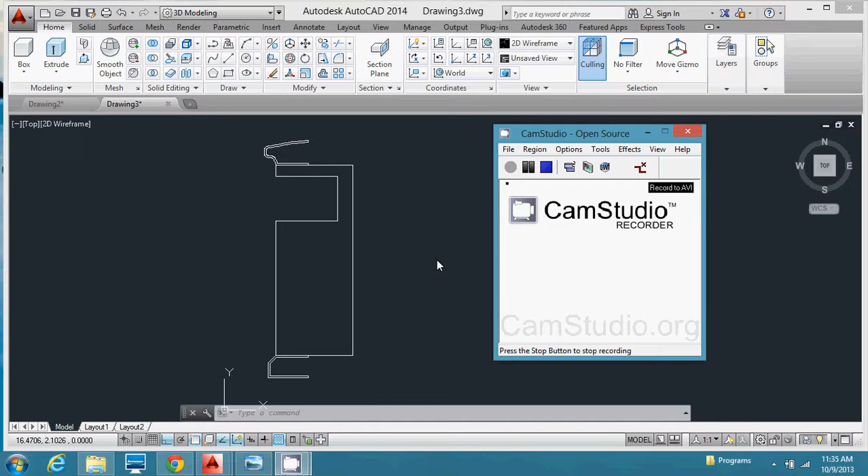Alright, our next step is to use the revolve command so we can revolve the top and bottom and see what we come up with.

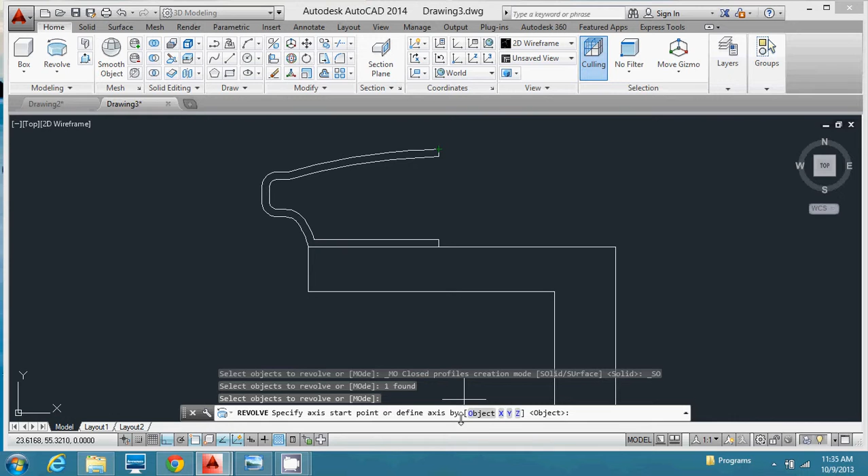To do this, you go to revolve, which is right under extrude. I select the first item and click space or enter, then I have to press the axis. So my axis is going to be this line right here, like so.

It's going to ask me at what degrees I want to cut it shorter. No, I want 360, so I click space or enter. And I do the same thing at the bottom piece.

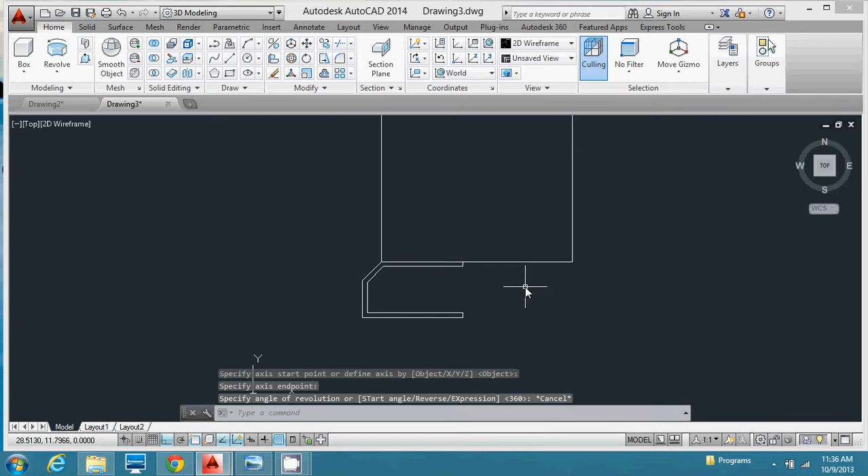Make sure you have ortho on, because otherwise sometimes your object will not be exactly what you were looking for. Again, select it, revolve. I have ortho on, so my mouse moves directly 90 degrees. And we have top and bottom.

Now to get a better visual view, I go to my view tab and go to conceptual. So you can see I have a top and bottom.

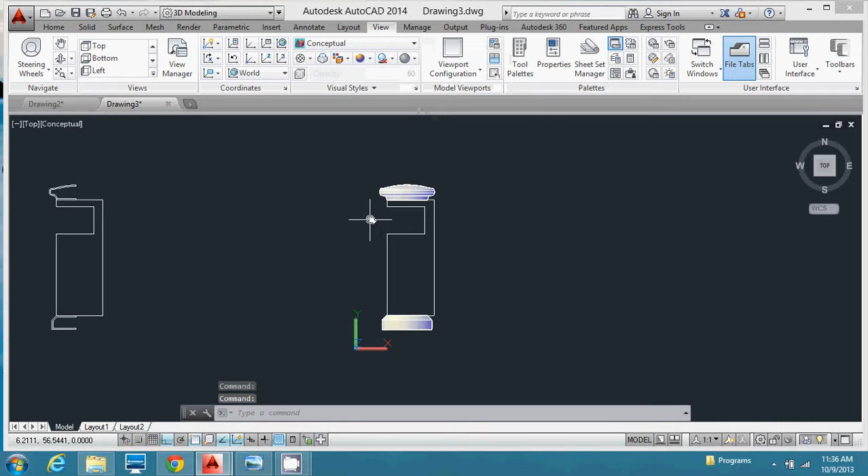Now it's a little bit smaller than I designed it to be, but that's alright, I can work with it. I can just make the body a little bit smaller than what was planned out to be.

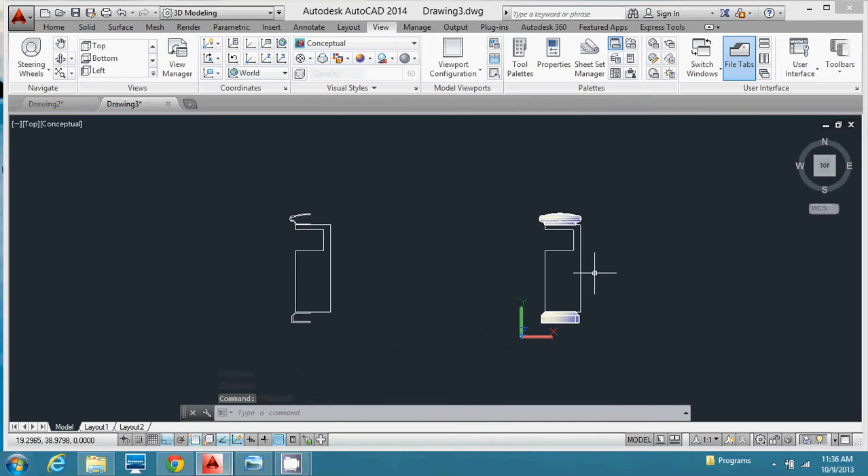So my next step will be to actually offset this box area to create some sort of opening. Actually, in this situation I made it too small, so I do have to resolve it because that opening has to be to specs, I have to make sure it's correct. Now to do this, I think my computer is going a little slow.

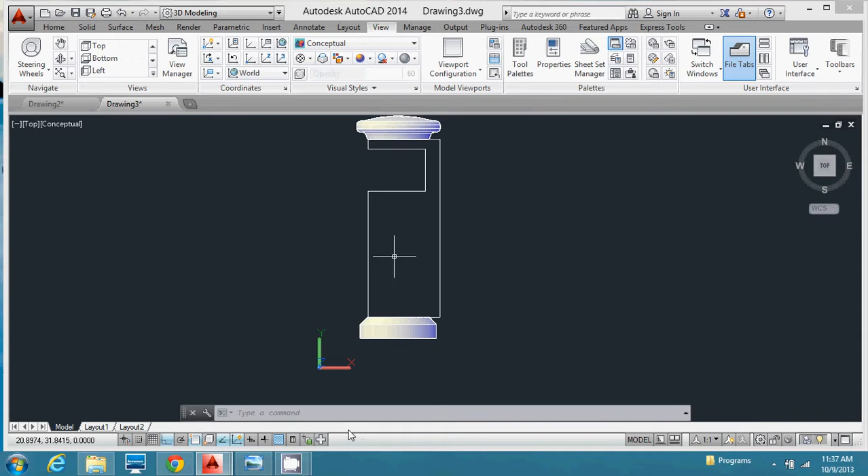Alright, sorry about that. So actually I'm going to leave it as is. I'm just going to stretch this back because it looks like I can keep it to this size since that mailbox opening does still fit and it gives me some support right here.

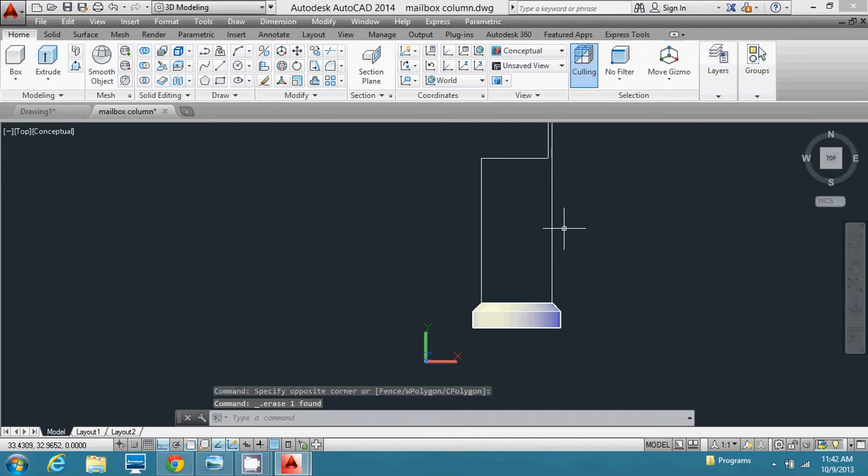So I'm going to delete these top and bottom. That's what my opening would be looking like. Kind of looks disastrous from this side, and actually if I was to be specific, it should be like this. That would be our opening.

Now I have my top and bottom. My next goal will be to extrude the bottom to the top. I'm going to use this box to remove the material.

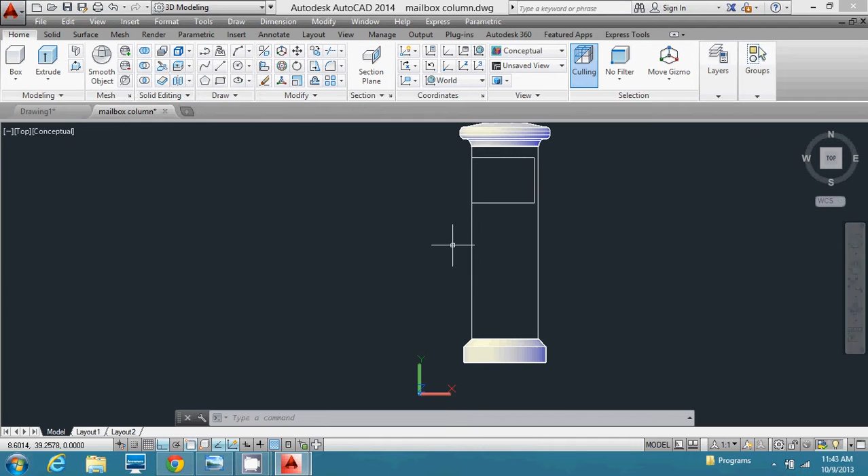Instead of drawing a circle and extruding, what I can do in this case, I'm going to go to 3D view and use extrude face. To do that, I go over here, extrude faces. The other option is to go to modify, solid editing, extrude faces.

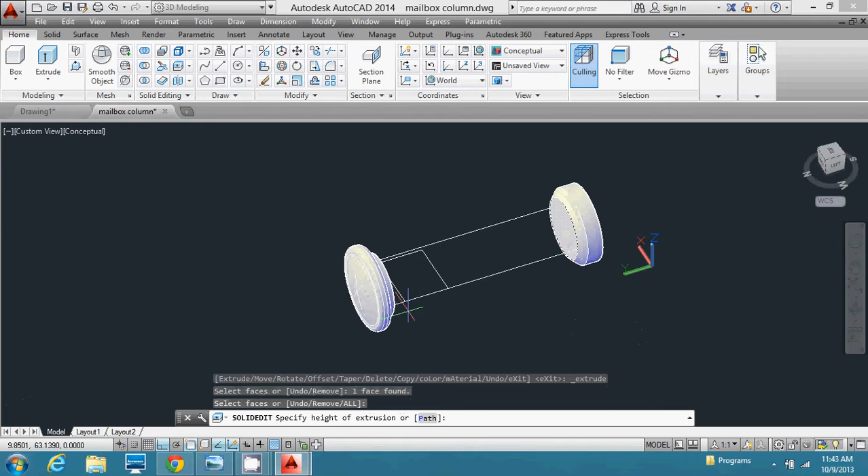I select the face I want to extrude, which is the circular one. Now it's going to ask me the distance, so I'm going to start from the center of that circle to the center of the top circle, and I keep that.

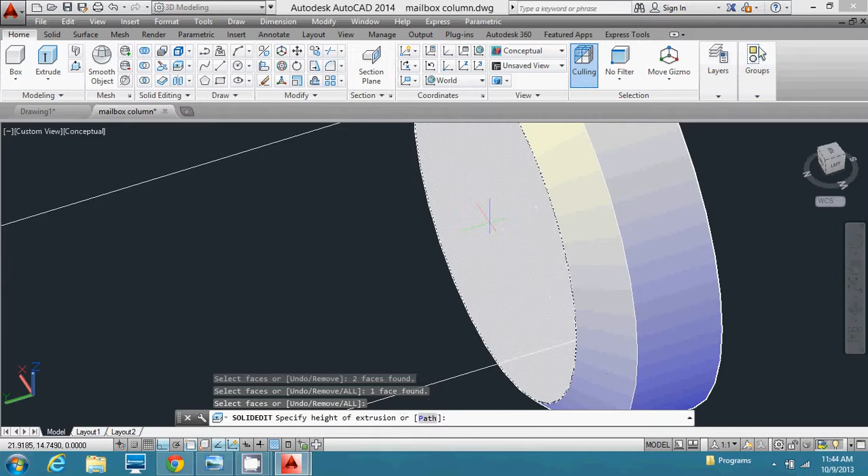Oh, looks like I hit the wrong circle extension. That's alright, you can undo and do that one more time. Sometimes it's hard to catch which center circle you're hitting. There we go.

And nope, it still doesn't work that well. That's alright, I'm going to extend it even more because we are going to union this later on, so I'm going to extend it about one inch. There we go, it might be overlapping, but that's alright.

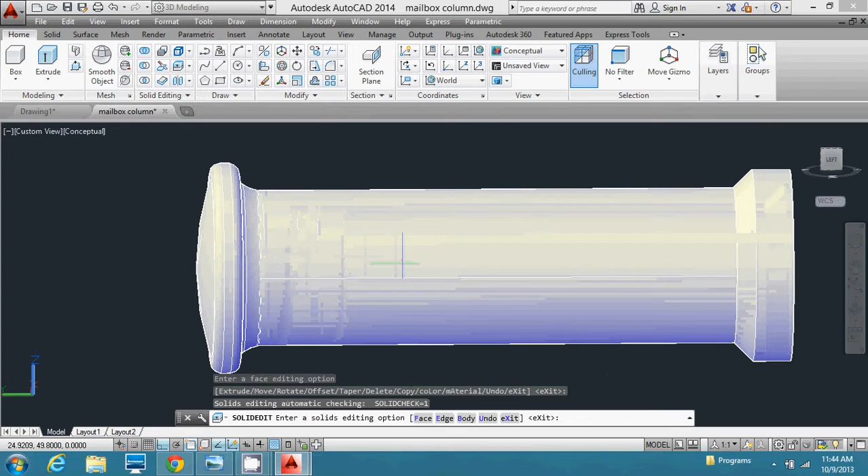There we go, we got all the pieces together. Now my next problem is I have to create that hole. To do that, I have a few different ways I can do this.

I can draw a square here and extrude it out and subtract it. Actually, we'll just do that, it will be the easiest way. So I'm going to bottom view, since my X and Y coordinates are this way. Yours might be different, that's alright.

I'm going to draw out the square, which is going to be 12 by 9 3/4. So I'm going to use the rectangle command, D for dimension, and do 9.75 by 12.

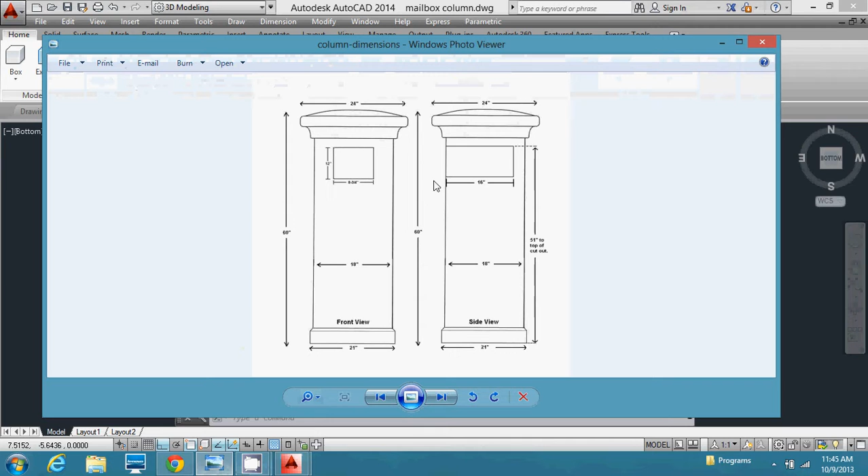So I have 12 high, 9.75 across, and 16 deep. So I have it the right way. I'm going to move it up to its location based on my reference drawing. I'm just going to draw myself a line here so that I make sure it is specified to the height. Move it down, and I'm going to move it across.

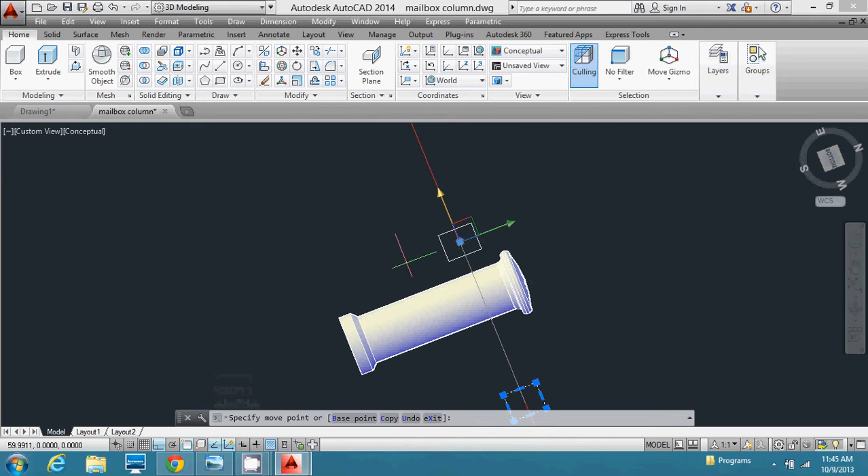3D rotate so that it's kind of centered. Oh, it's actually not that centered. So I'm going to extrude it now. That way I have a 3D item. 16.

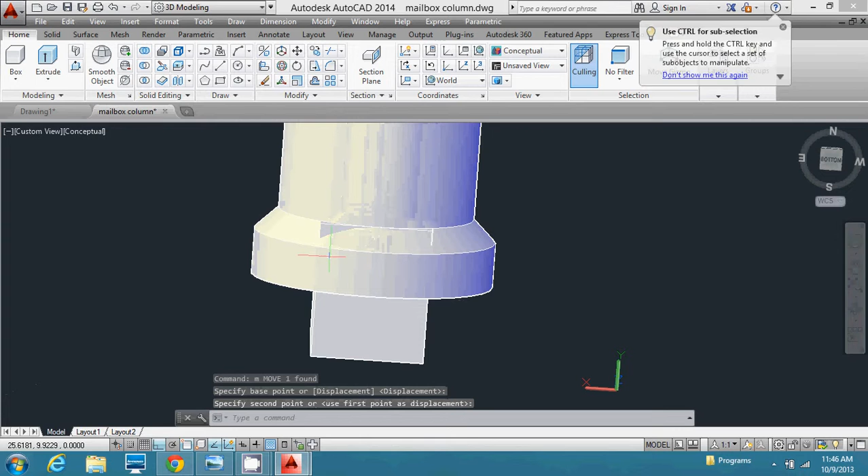We have it there. And to make my whole life much easier, I'm just going to move it from the midpoint to the quadrant of the circle. If you can't hit the quadrant, make sure your OSNAP quadrant is on. From this point, I go up. Let's see what kind of distance I have.

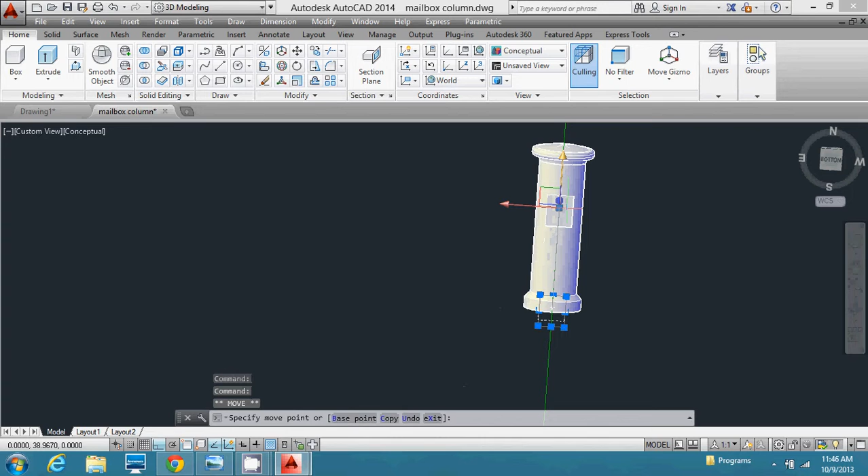From this point to this point, 48.5. So I can easily do that. Use the green arrow, 48.5. And now I can subtract. Subtract from that item this. There we go, we have our slot for the mailbox.

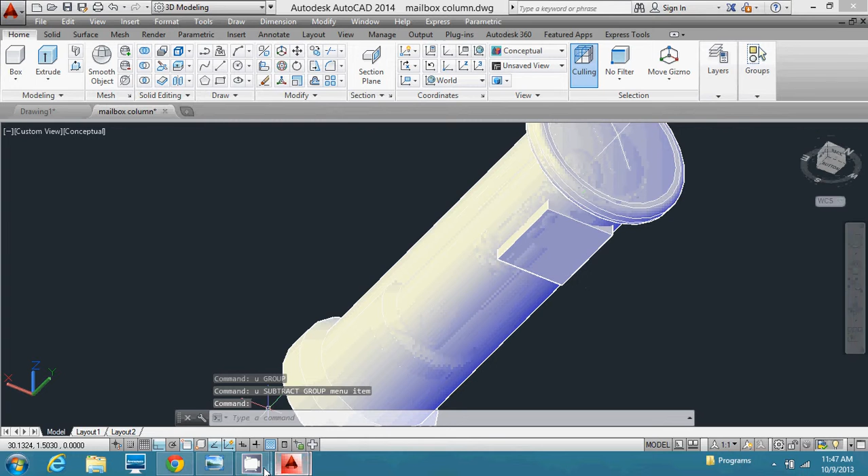Oh, it's a little deeper than I thought. So I'm going to undo. I'm not sure if there's a requirement to the actual depth size, but that's alright. I'm going to move it up on the z-axis about 1 inch, and that should be enough.

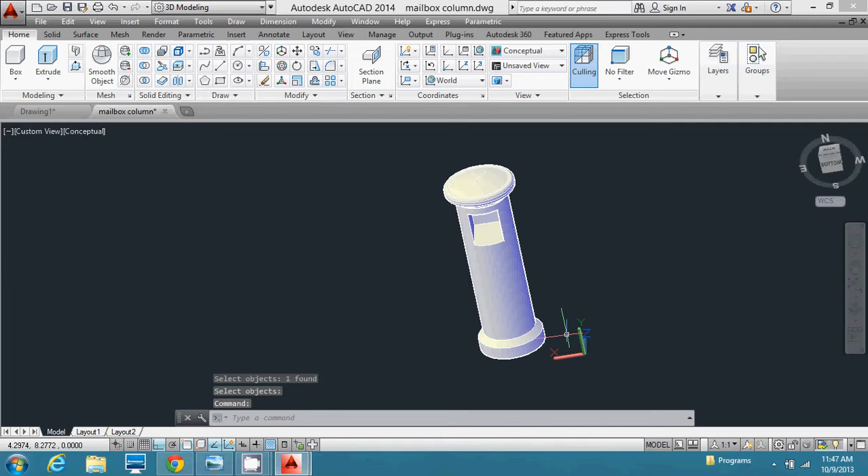So I have a 15-inch deep. And I'm going to use the subtract command again. Subtract, select the item that I want to subtract from, and now the box. There we go. So my next thing I want to do is actually make this item hollow.

To do this, I can use the shell command. Now make sure you save your work before you do this, because sometimes the computers crash. So to do the shell command, you have to... oh, that's not where it was. Sorry, I know that's modify, solid editing, shell, but I'm trying to find it here for you guys.

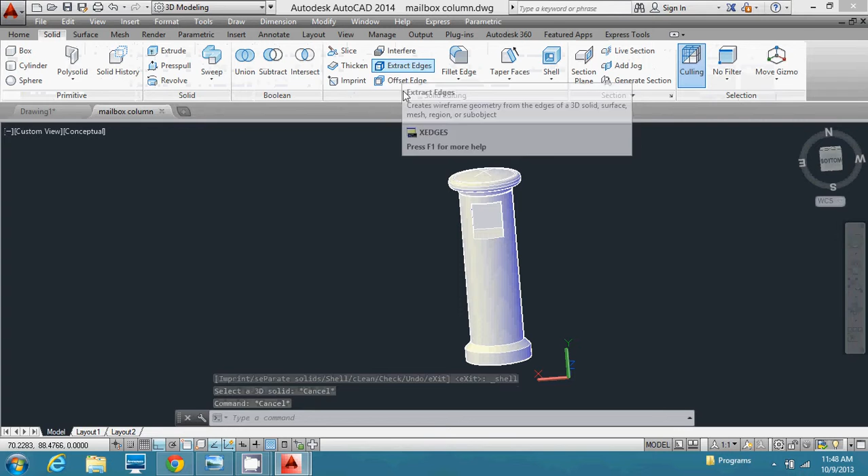Oh well. Oh, sorry, solid. There we go, and shell. There we go. So select the object which I want to shell. Oh, this is union because it got extruded. So this can be an issue because it's hollow in here, but not hollow here. So the shell might have a big problem with this.

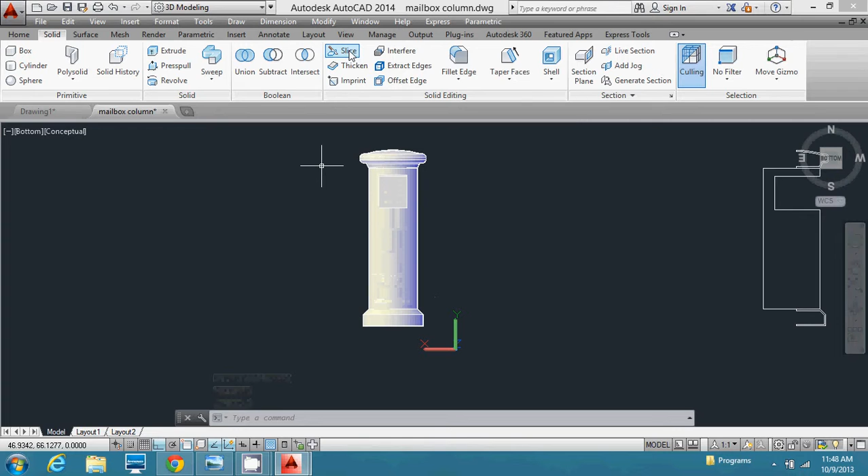So before we even do that, I want to go over the option of slicing. I'm going to slice the bottom so we separate the two items. To do that, you go to the slice command. You select the object that you want to slice, and you use a reference line. So I'm going to use the center of the circle as a reference, and now it's cut into 2 pieces.

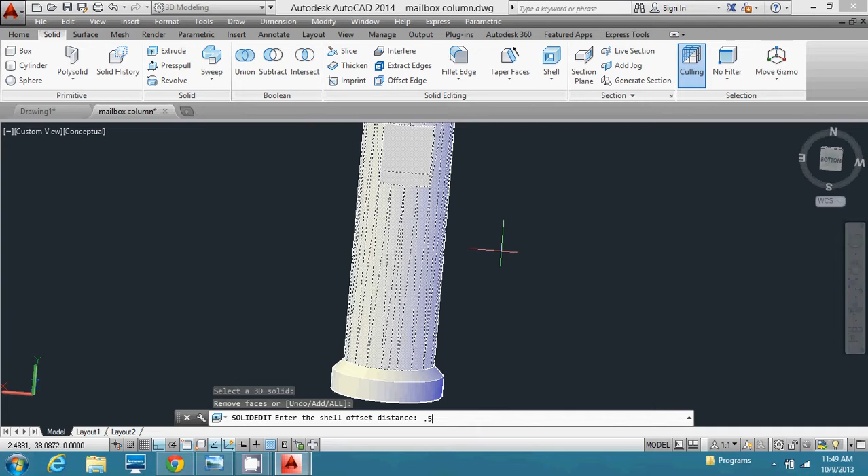That's 1, that's 2. Now we can go back to our shelling. We go to shell, we select the object you want to shell. It's asking about removing faces—that's the one that's going to leave an opening to the item. We actually don't want any openings right now, so I'm just going to leave it as is. And the shell distance, make the thickness of the item about 1/2 inch. Keep it consistent.

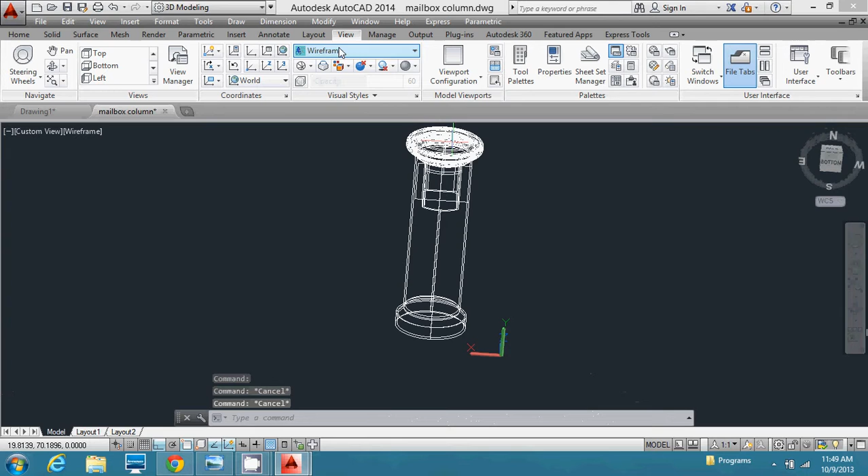So now it should be... let's go to a better view, maybe a wireframe. You can see there's an actual thickness to it. So to prove this, since it's a little too difficult to see, I can again use the slice command to give you a view inside.

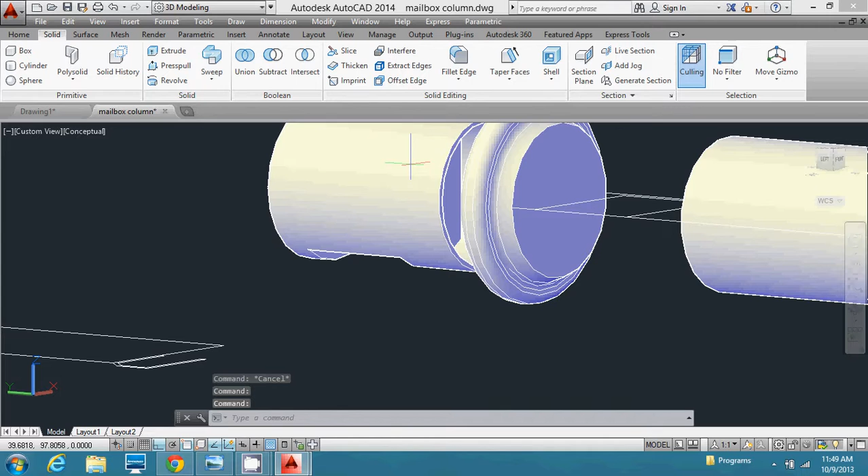But I'm just doing it for demonstration, you don't have to do this. So you can see it's only a 1/2 inch thickness all around. Even the boxes inside, if you were looking at the box, it's 1/2 inch. Alright, I'm going to undo. That's how you would examine if your object is solid or not. Sometimes you get wireframes, which is not what you want. Alright, this completes the first portion of the mailbox.

Next step will be to create the door. So we'll do that next.